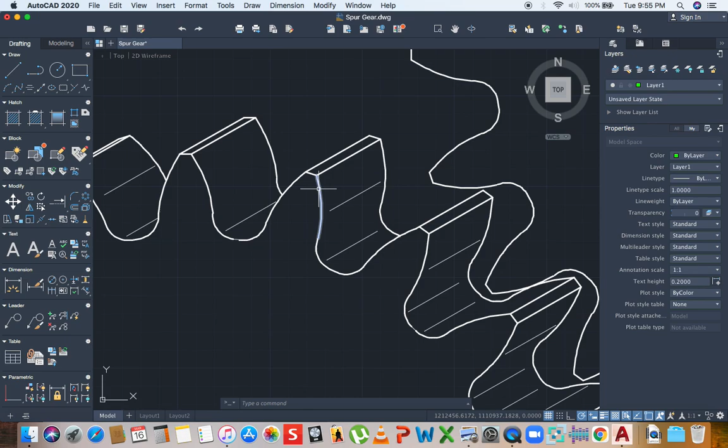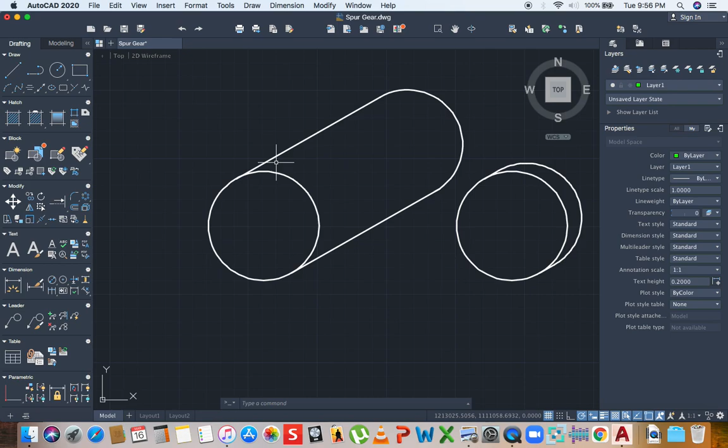All right, so these are two spur gears, and these two spur gears are of equal size, and they are working together in a machinery. Now, the reason why I call this a cylinder, it does not look like a cylinder, but if you remove the teeth, you will suddenly realize that it's a cylinder. Now, if you look over here, you have two cylinders, a very long cylinder, because the height of the cylinder is very large as compared to the diameter, while here the height is considerably smaller than the diameter. So this type of cylinder that we're looking at here is this type, just with some teeth and a hole in the middle.

Now, in order to draw a spur gear, there are a lot of things that we have to know about the spur gear, because at this level of mechanical drawing, we are going to be required to draw two spur gears that are meshing against each other, right? And by meshing, they are working together to transmit a force or transmit movement.

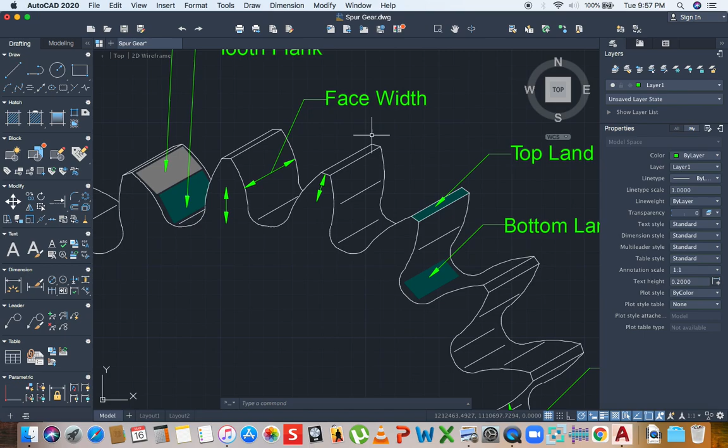Okay, so let's scroll down a bit further, and here I have two images of the same spur gear. Now, let's go over to the image that is more relatable, the image to the left. If you look, you are seeing some labelings that are showing you the different parts of the spur gear. Now, as you can see, this is a spur gear tooth, and this specific spur gear is designed to have 20 teeth.

Now, there are different parts of the teeth. If you look at the top of the teeth, the top surface of the teeth is called the top land. The bottom surface of the space between two teeth is called the bottom land. Let's go over this side. If you notice, this is the side surface of the teeth, and the portion at the top is called the face of the tooth. The portion at the bottom is called the flank of the tooth. Now, let me show you how you know where the flank starts and stops, or the face starts and stops.

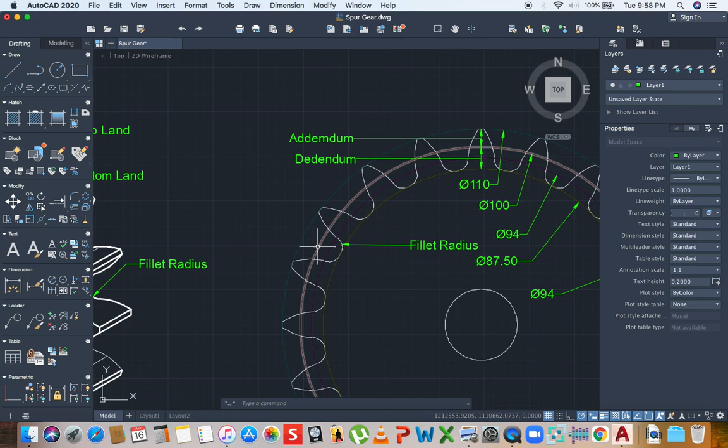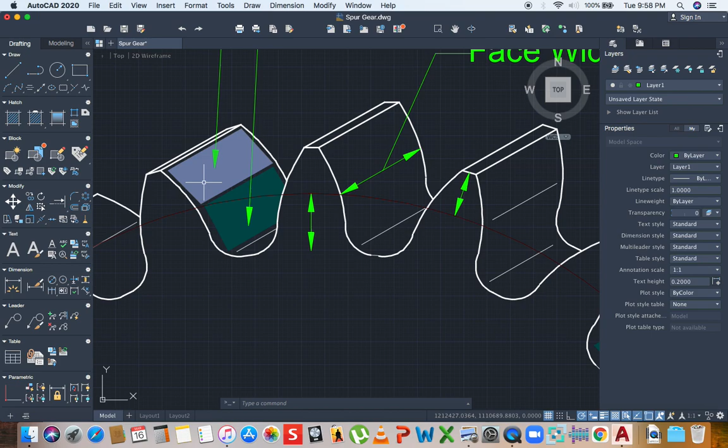This circle right here is the most fundamental circle of drawing a spur gear, and it is referred to as the pitch circle. Let me copy this pitch circle and paste it in the center of the spur gear over here. Now, if you notice, the pitch circle cuts the tooth here. So every part of the side surface above the pitch diameter on the tooth is referred to as the face of the tooth, and the surface below the pitch circle is referred to as the flank of the tooth. I'm not going to remove this just yet.

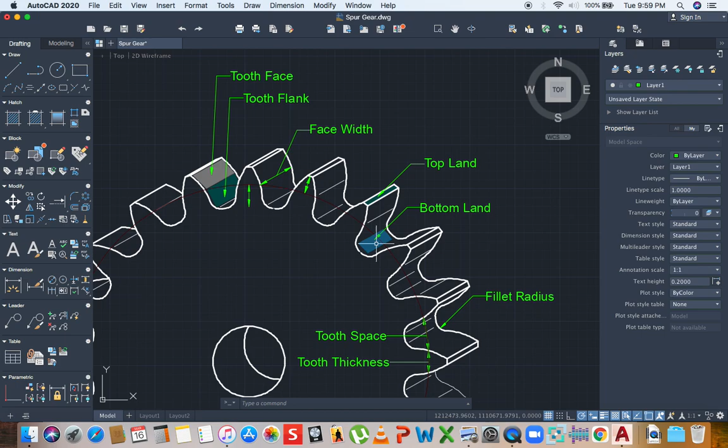Let's look at some other parts. Now, you have the tooth thickness, and this tooth thickness is measured along the surface, or along the pitch circle, as you can see, and you have the space between the tooth.

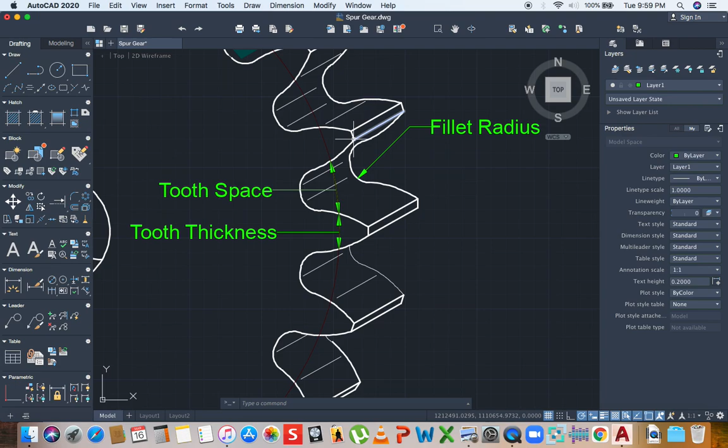If you notice, if you're measuring the distance between two teeth, if you measure from the top, you'll have a greater distance than if you measure from the bottom. So that is why you have a specific spot that you will use to measure the space. And it is measured along the pitch circle. It's similar to the tooth thickness.

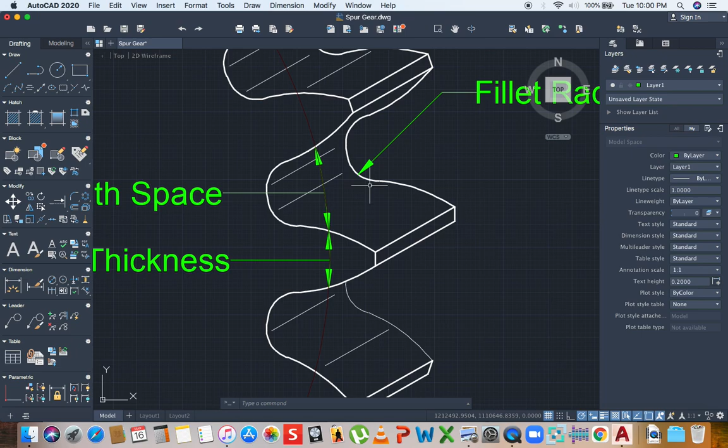Now, then you have the fillet radius, right? The fillet radius is the radius of the circle that will mesh the tooth profile with the base of the tooth, right? So it will not just have a sharp turn, it will have a radius, and that radius is called the fillet radius.

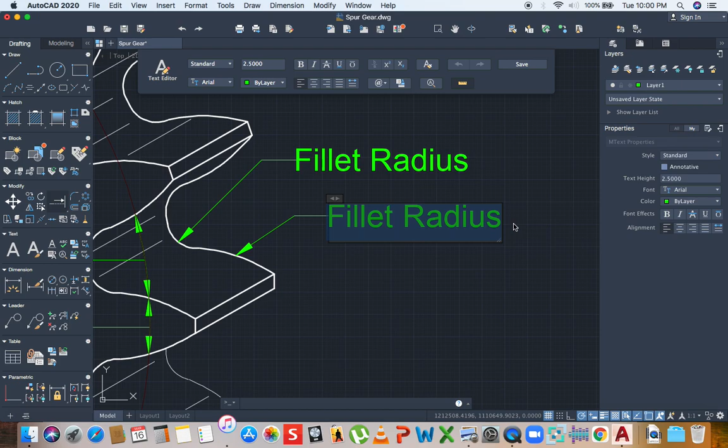Now, I forgot to label the tooth profile of this spur gear, and this is an involute tooth profile. So this curve is referred to as the tooth profile of the spur gear. And in future videos, you will be shown how to construct that. Let me see if I've missed out anything. Oh yes, there are two measurements.

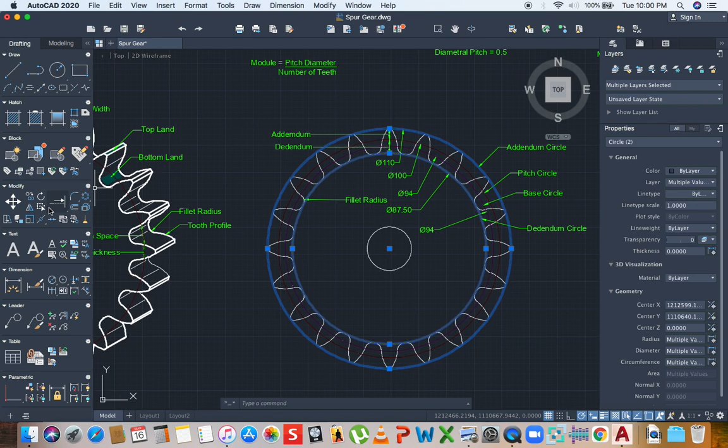I'm going to copy this circle and this circle over here. Now, if you notice, there are two distances that are shown here. This distance, by the way, this circle is referred to as the Dedendum Circle. This circle is referred to as the Addendum Circle. You may see other names that are used to refer to these circles.

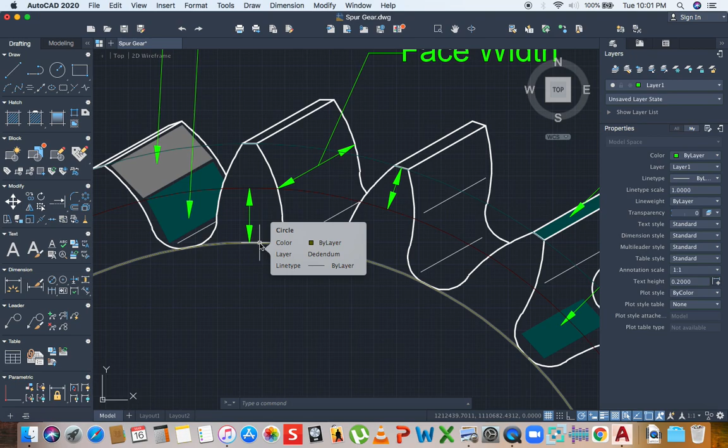Like, for example, the Dedendum Circle is also referred to as the root circle. The Addendum Circle is also referred to as the outside circle. Okay? So, the distance between the root circle and the pitch circle is referred to as the dedendum, as you can see, and the distance between the pitch circle and the outside circle, or the addendum circle, is referred to as the addendum.

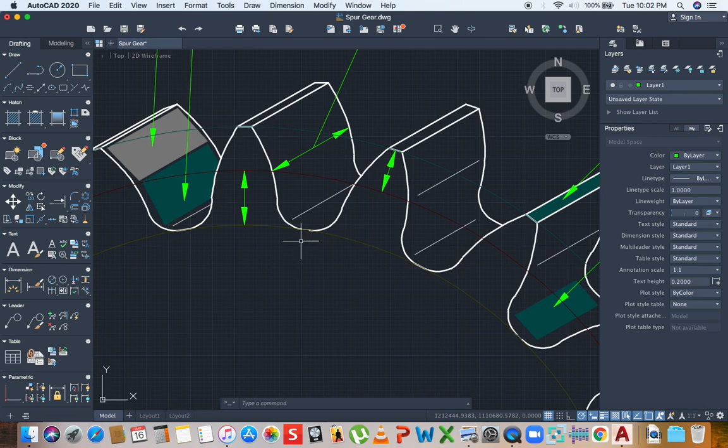So you have dedendum and you have the addendum, and these distances are critical in constructing the drawing of the spur gear. Let me see if I have everything. Yes, we looked at all these already.

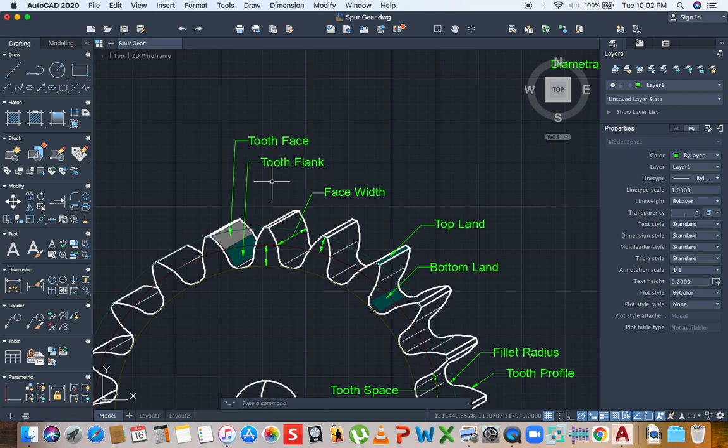So now let's go across to this picture here, or this image here. This image is showing the same spur gear over here. Now over here, this is a very simple diagram. It's just showing you the parts and so forth.

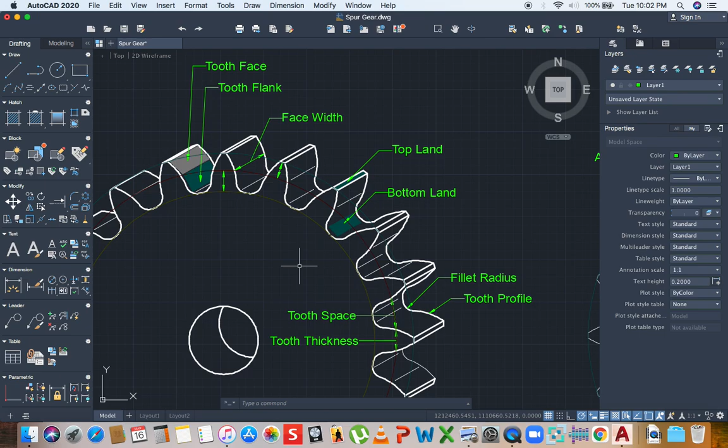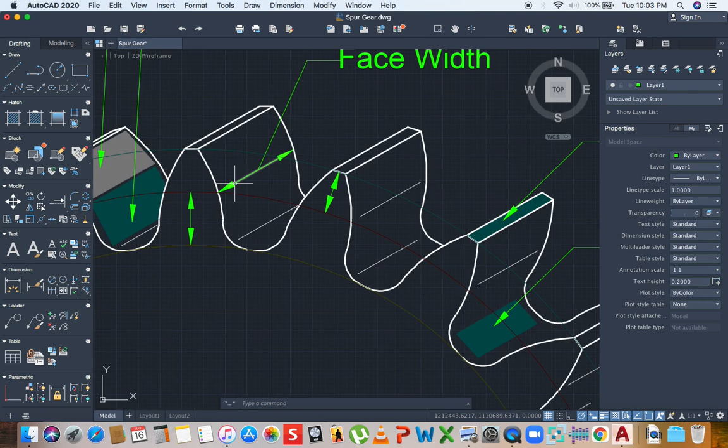Oh, by the way, I missed out the face width. The face width is basically the thickness of the spur gear, right? The thickness, which for the cylinder that is used to make the spur gear, would be the height of the cylinder. It's the distance between this face and the face around the back. Well, it's the face width. As you can see, this is the face of the tooth, and the distance of the face is right here.

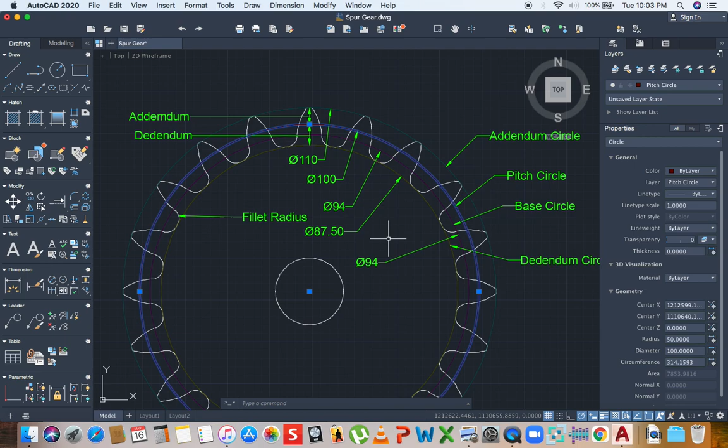Now, let's look at this image here. This image is basically showing some parameters that are necessary in order to construct this spur gear. Now, let's look at it. This circle here, that will be, in a lot of cases, the first circle that you will draw. And this circle that I've selected is called the pitch circle, right?

The pitch circle size will be determined by all the space that the spur gears that are going to be working together will fit in. So you determine this distance if it is not given to you. After determining the pitch circle, you have to determine the amount of teeth that you want in the spur gear. That is if it's not given to you already.

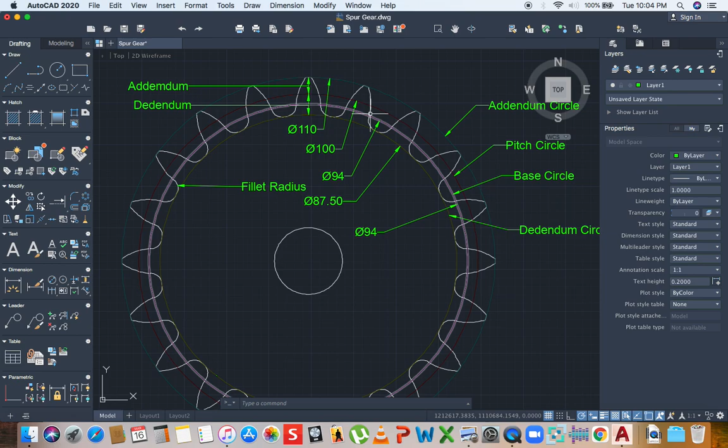Now, on this specific spur gear, there are 20 teeth, right? So the pitch circle diameter, which is the diameter of the pitch circle, and the number of teeth are critical parameters to note in order to construct this. All right, and as you can see, the addendum is shown here again.

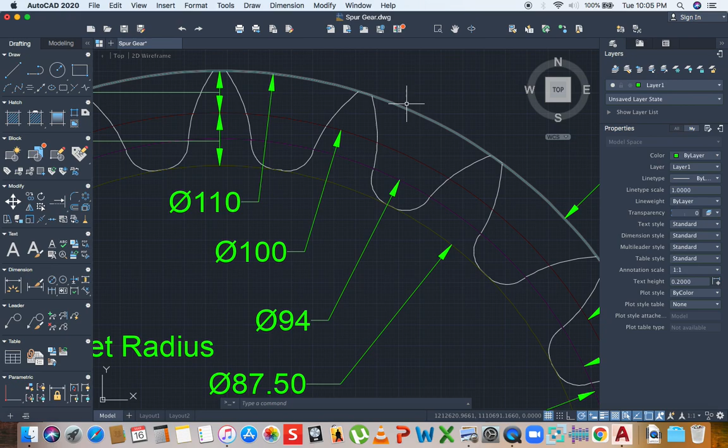The addendum is shown. Okay, and as you can see again, you have the addendum circle, right? That is why the distance from the pitch circle to the addendum circle is referred to as the addendum. You have the addendum circle, and as you can see, this is the circle that cuts off the spur gear, because these involute curves would eventually meet and form a pointed edge.

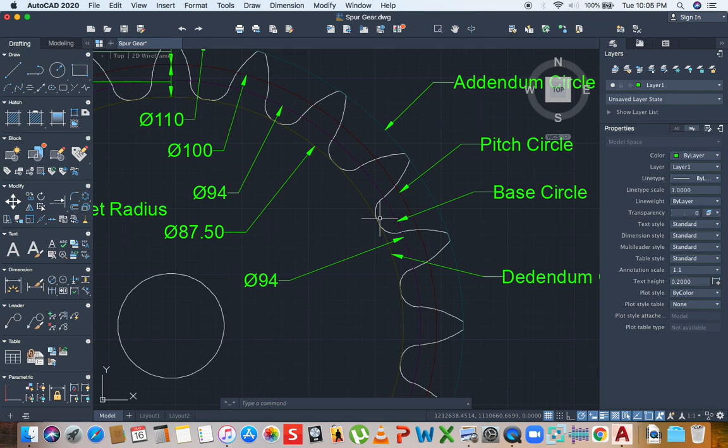But the addendum circle shows where the teeth ends. All right. So you have the addendum circle, and then you also have the dedendum circle. This is the base of the teeth. So the teeth, they don't go below the base, right? So you have the addendum circle and the dedendum circle, and you have the addendum circle diameter, and that is right here. You have the dedendum circle diameter, which is right here.

Now, there are a lot of cases where you will not be given the addendum circle diameter and the dedendum circle diameter. Those circle diameters are critical in constructing the spur gear. If you notice, there's another circle that is called the base circle. That circle you will eventually find, right? And in the next video, I'll explain further on how to find the base circle when we're actually going to show you how to construct the spur gear.

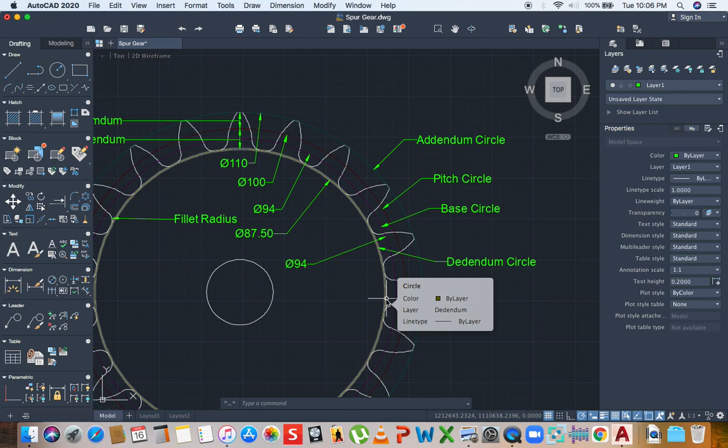So please observe the diagram again. I've already explained what the addendum is and the dedendum. They are distances, and you can see the distance. One is between the pitch circle and the root circle. The other is between the pitch circle and the addendum circle, right? There's a way to achieve the base circle diameter, and that will be in a further video as I explained before.

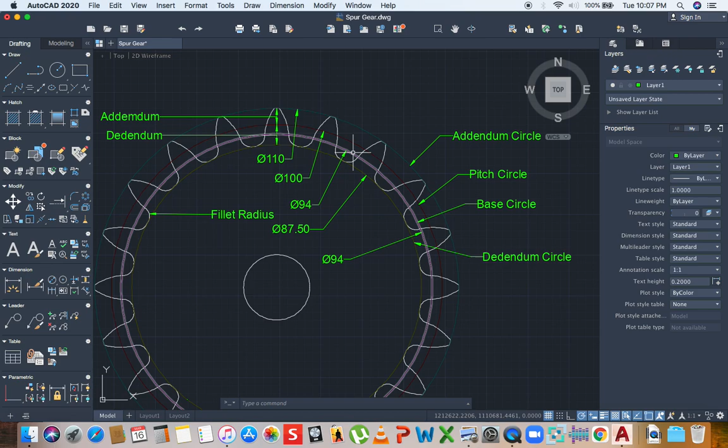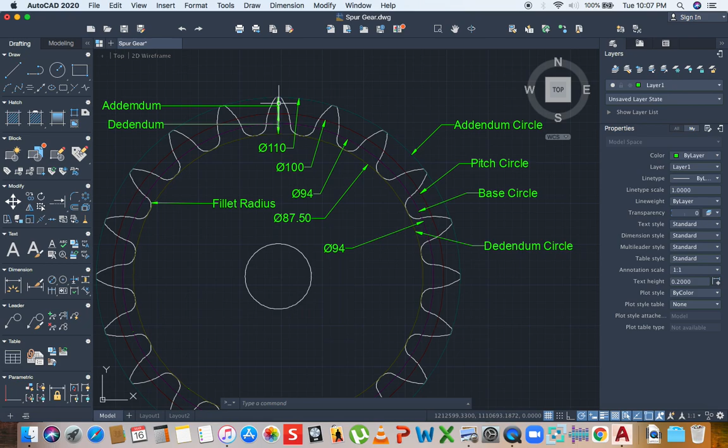Now, after you have selected or assumed the number of teeth that you need, and you have selected a suitable pitch circle diameter, you need to now determine the diameter of the addendum circle and the dedendum circle. Once you get those distances, you are now able to achieve the addendum and the dedendum. Now, let's go over to these formulas.

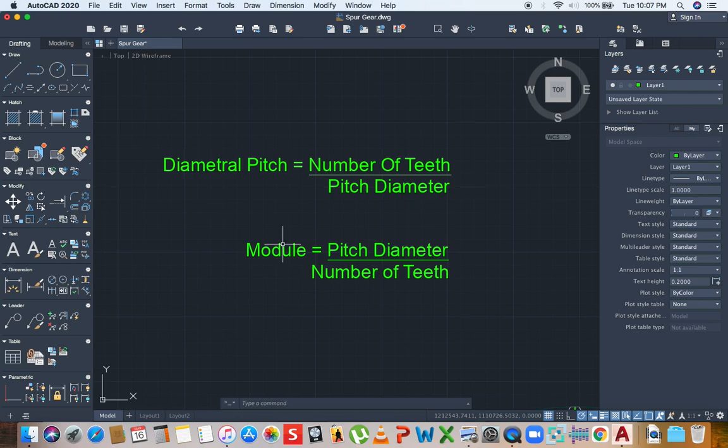There are two critical formulas here that are necessary in order to draw the spur gear. I don't know if I should refer to this as a parameter, but this is the first formula. You need to find the diametral pitch of the spur gear, and you also need to find the module of the spur gear. And as you can see, this simple formula only entails division. It is showing you how to get the diametral pitch, and it is also showing you how to get the module.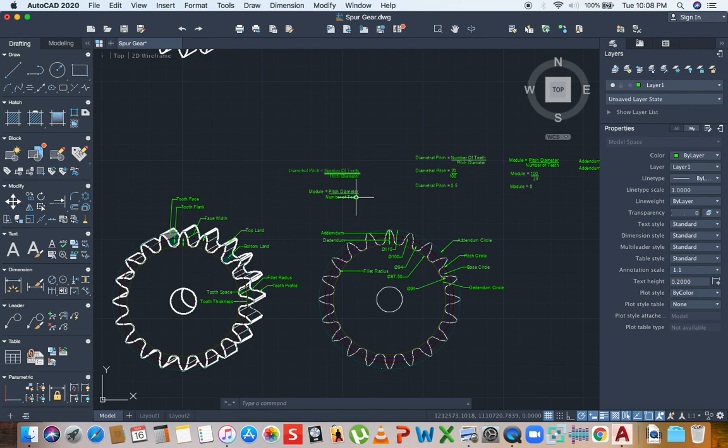Now, the diametral pitch is found by dividing the number of teeth, in this case it's 20, by the pitch diameter. Now, if we're supposed to find the diametral pitch for the specific spur gear that we're looking at, please observe the measurements here. You will realize that once you divide the number of teeth, which is 20, by the pitch diameter, you will end up with a diametral pitch of 0.5. Okay, or this is half.

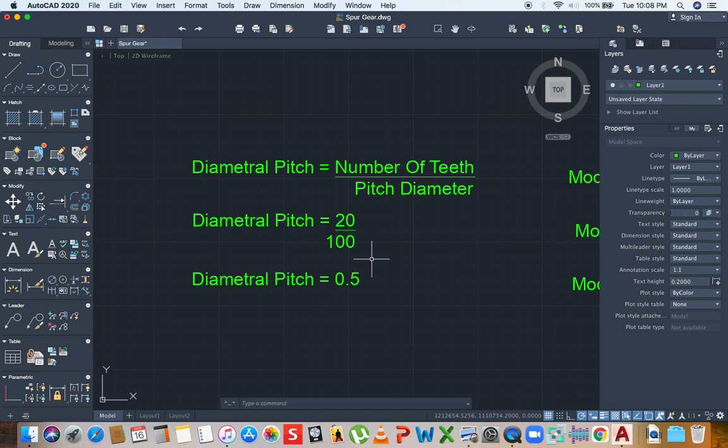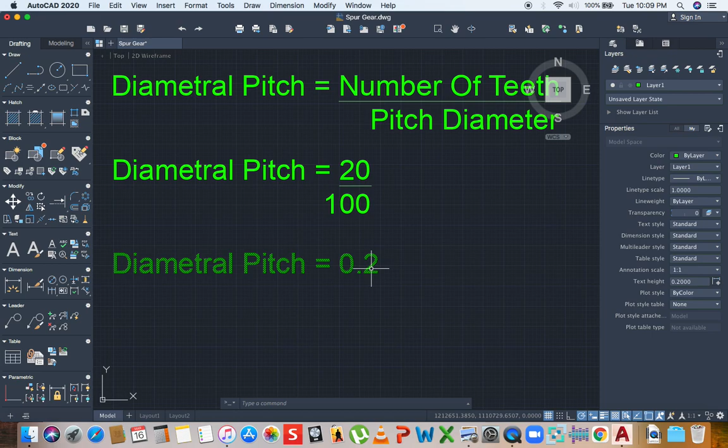I think I may have calculated this incorrectly. Let me go ahead and correct that. So it's 0.2 actually. All right, so 0.2 is the diametral pitch right here, right? So the diametral pitch here is 0.2. Now, what is the purpose of finding the diametral pitch?

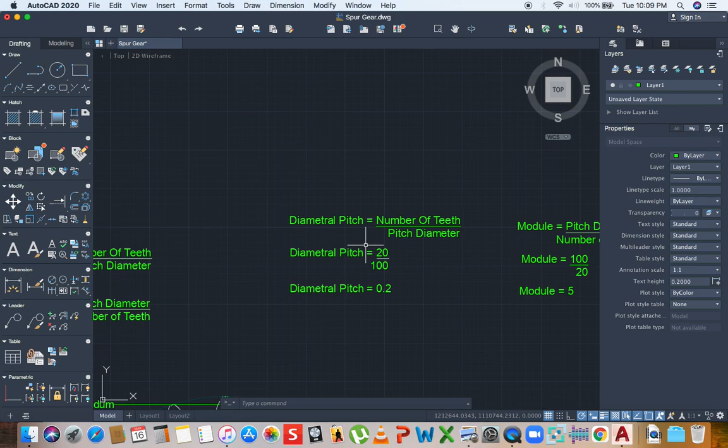Let me explain. Now, if you have two spur gears meshing together, once the sizes are different, they are going to need a different amount of teeth. For example, the larger spur gear will possess more teeth than the smaller spur gear. These spur gears that you are seeing here are of the same size. But you have instances where one spur gear is larger. Now, if you have a larger spur gear, let's say this was the larger spur gear and you needed a smaller spur gear, right?

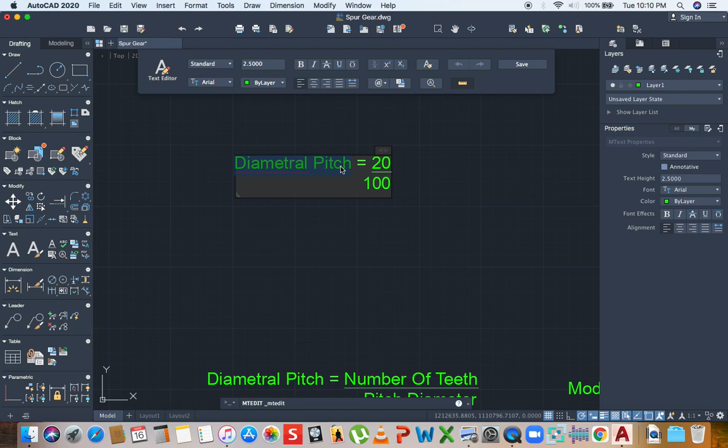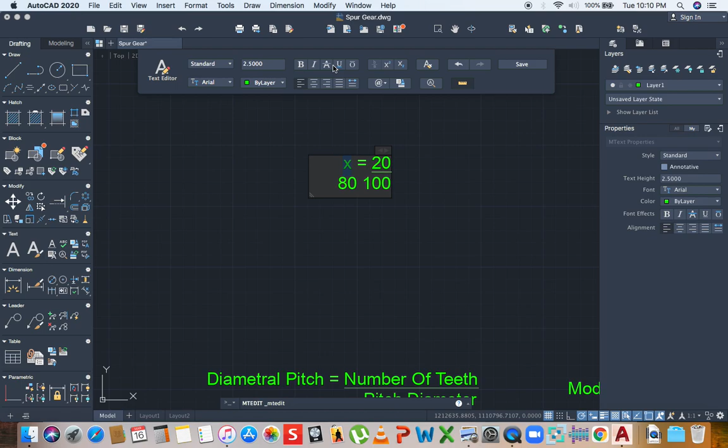And let's say that the smaller, let me copy this formula. Let's say that for the smaller spur gear, the diametral pitch, the pitch diameter for this smaller spur gear, let's say that it was 80, right? All right. So this is the diametral pitch over here for the larger spur gear. The number of teeth versus the pitch diameter.

For the smaller spur gear, the pitch diameter is 80 and we don't know the number of teeth. Remember we said that it's supposed to be less. So whatever the diametral pitch is over here, it is supposed to be the same over here. So this is the, let me go again so I don't confuse you guys.

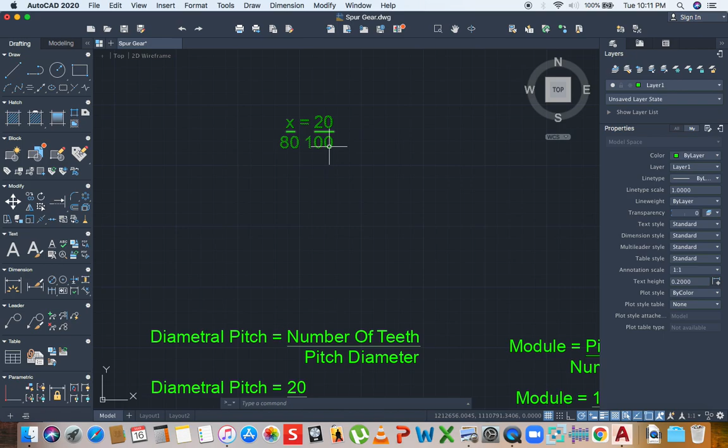This is the number of teeth for the larger spur gear. This is the pitch diameter for the larger spur gear. For the smaller spur gear, we are given a pitch diameter of 80 millimeters. In order to calculate the number of teeth needed for this spur gear to mesh, you are going to use this equation here. Now, you are going to solve for x.

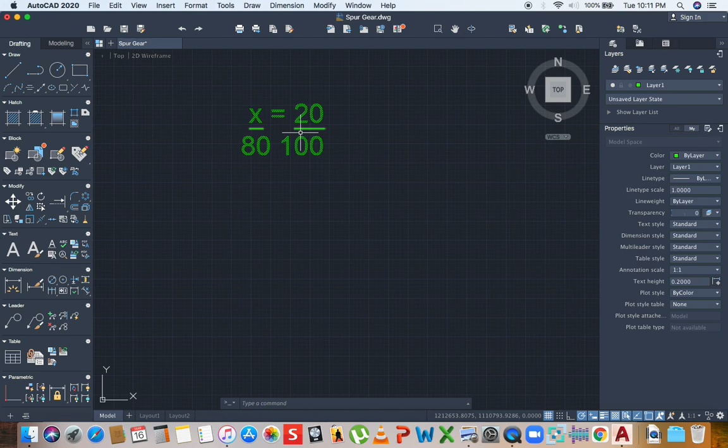So x would be 20 divided by 100. Let me see if I have this formula right. Yes. So this would be 2. This would be 10. This would be 1. This would be 5. Right? And if you were supposed to bring the 80 over, all of a sudden the 80 would be divided by the 5. 80 divided by 5, and the answer is 16.

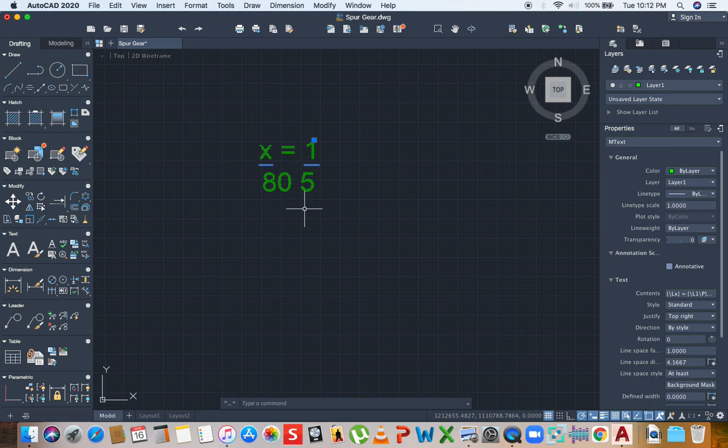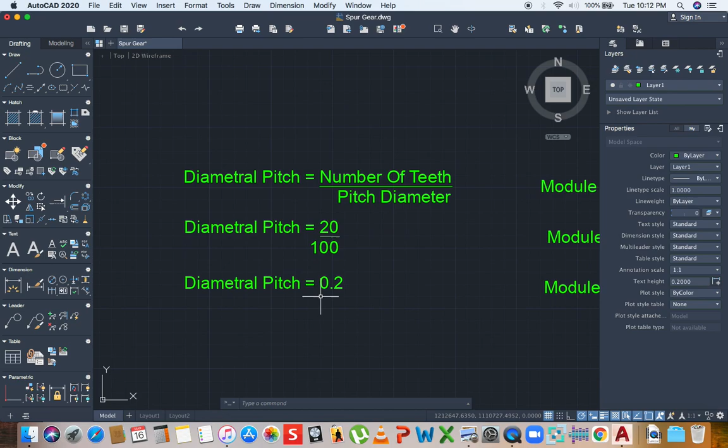So let me put 16 here, the 20 here, and the 100 here. Now, 16 divided by 80, if you check that out, you will get 0.2. That is the diametral pitch. If you divide the 20 by 100, you'll get 0.2, which is also the diametral pitch. So you realize that even though the two spur gears are of a different size and have a different number of teeth, the diametral pitch for both is the same.

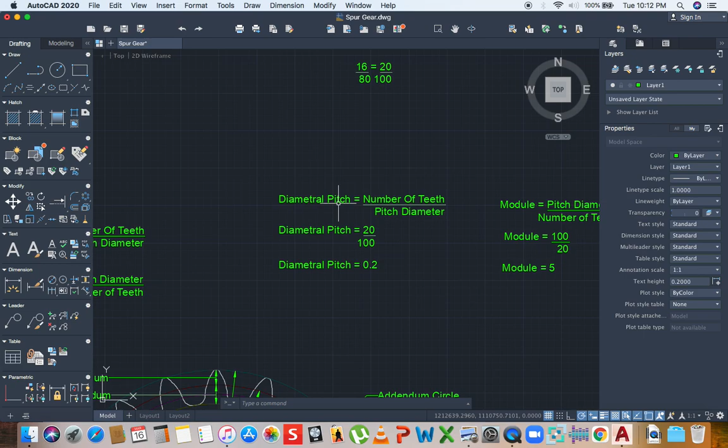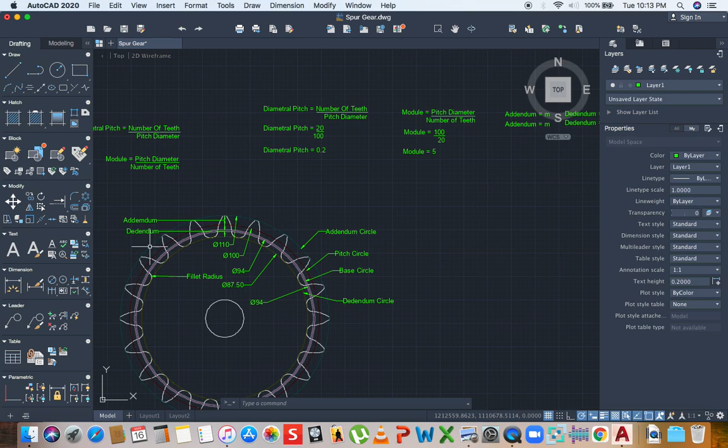For these, they are the same size, so they'll have the same number of teeth. So you get the idea. The diametral pitch is used to determine the number of teeth that you need for the second spur gear, because you would assume the first one. There are some other formulas, and this is more advanced stuff, to calculate if the number of teeth is suitable and so forth. But for now, let's say that our assumption is correct and we have safely assumed the number of teeth.

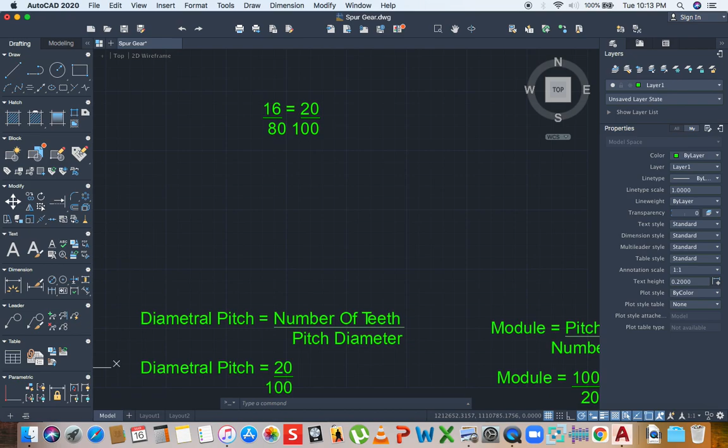Then we can now find the pitch diameter of the other spur gear. If it is given, then you use it, and you can use this formula to determine the number of teeth for the smaller spur gear. I'll explain that in a future video when I'm actually constructing the spur gear.

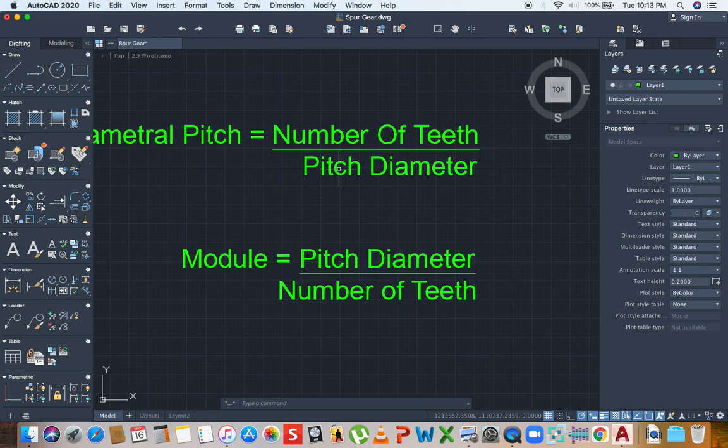Now, the next formula that is critical is the module formula. In order to find the module of the spur gear, notice these formulas are similar. In one, you divide the number of teeth by the pitch diameter, while for the module, you divide the pitch diameter by the number of teeth. For this specific spur gear, you are dividing 100, which is the pitch diameter, by the number of teeth, which is 20, and the answer is 5. So the module is 5.

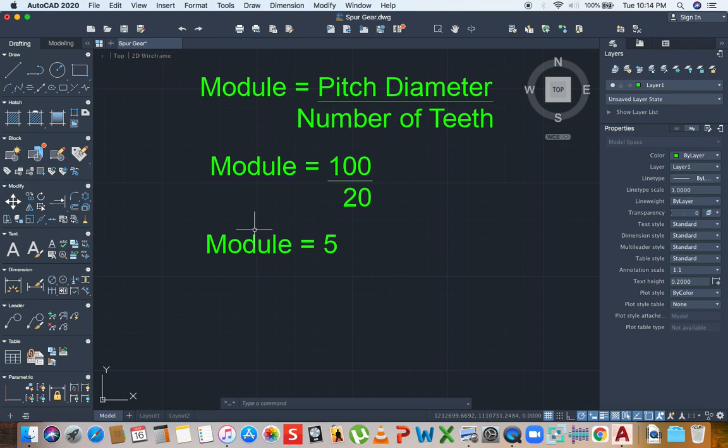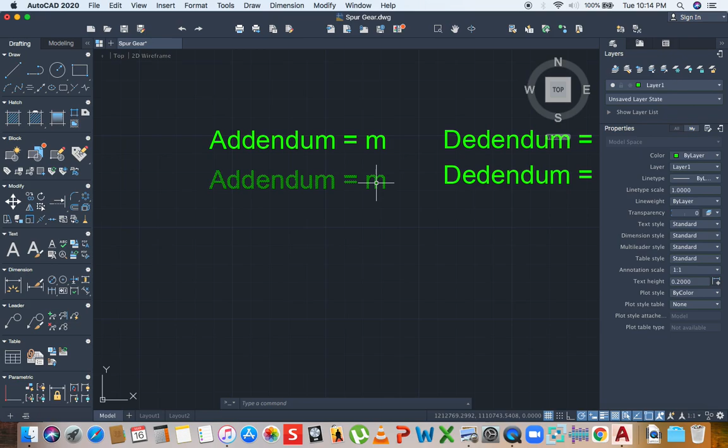Why would we need to find the module? The module is used to determine the addendum circle diameter and the dedendum circle diameter. So now you know how to achieve this circle, which is the dedendum circle, and this circle, which is the addendum circle. Now, most commonly, the addendum is given as m, like how the module is 5. By the way, this M stands for module. So the addendum equals 1 module.

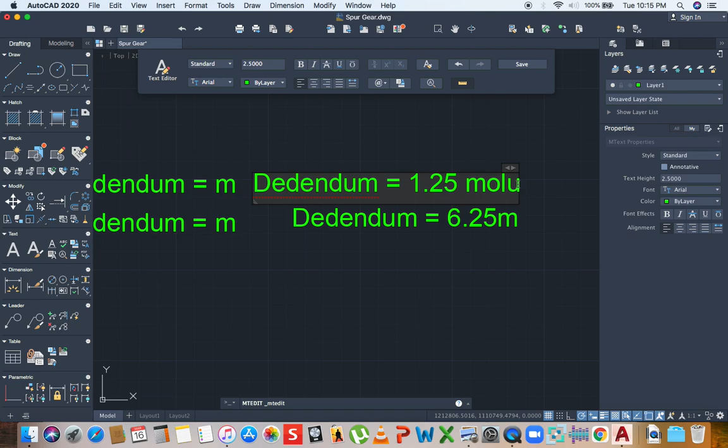The dedendum equals 1.25 modules. So this is modules. Let me write modules so you're not confused. I don't want you to think it's millimeters. So let me bring this over a bit.

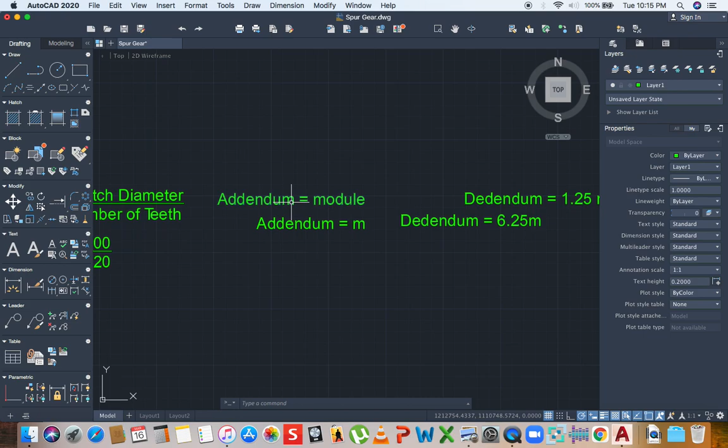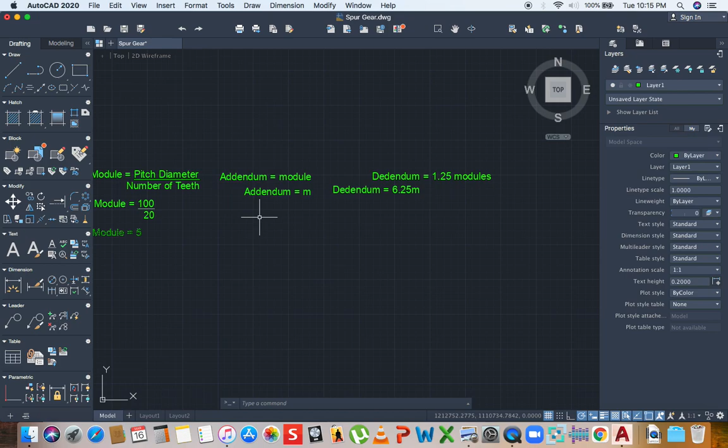Okay. Since the addendum is equal to 1 module and the module for this spur gear is 5, the addendum for this spur gear will be 5. Since the dedendum is 1.25 modules and the module is 5, the dedendum is 6.25. All right, let's do that again.

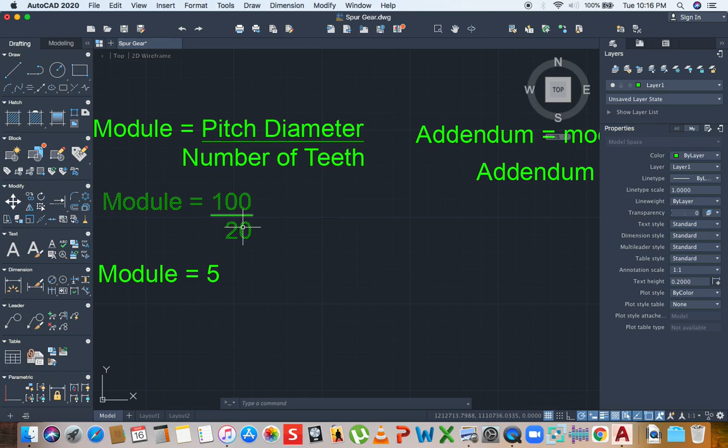We calculate the module using this formula, and for this specific spur gear it is 100 because the pitch diameter here is 100, as you see it's pointing on the pitch circle, and that is divided by the number of teeth, which we know is 20, and you get 5. Now this module is used to determine the addendum.

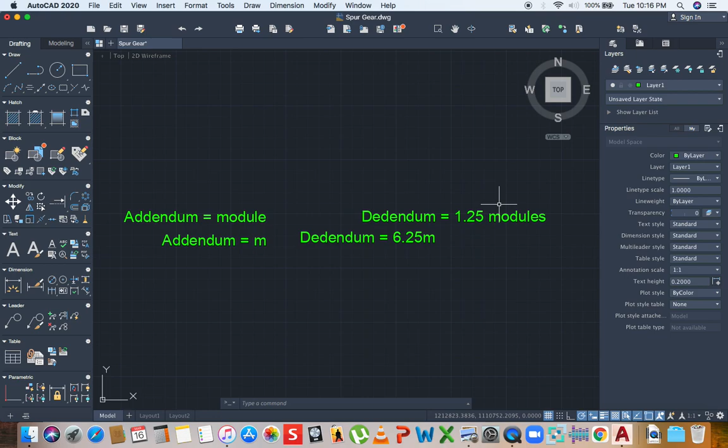There are various values that are used for the addendum and the dedendum in terms of modules. Sometimes the addendum is 1 module, sometimes it's 1.35 modules, it varies. But most often the addendum is 1 module and the dedendum is 1.25 modules. And that's what I'm working with today. So the addendum is 5.

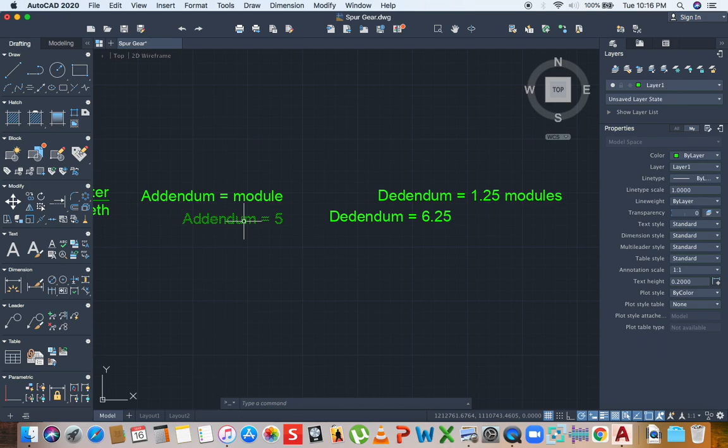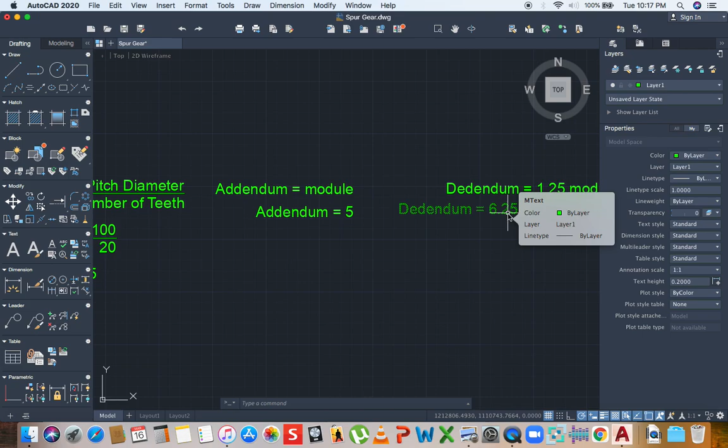And if you notice, I'm working unitless. I didn't specify what units we are working with, whether it was millimeters or so forth. So the addendum is 5, while the dedendum is 6.25, based on what the dedendum normally is. If the dedendum was 1.35 modules, we would have multiplied 5 by 1.35, and then the answer here would be different. So now if you look here, the addendum is 5, the dedendum is actually 6.25, and I could have just put in brackets here.

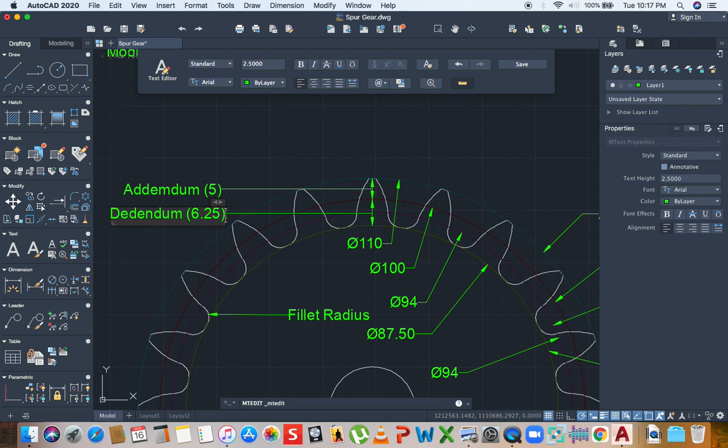In this case, the addendum is 5, and the dedendum is 6.25. Now, what does that mean for the addendum circle diameter? All right. So since the pitch circle is 100 millimeters in diameter, it would simply mean that the addendum circle would be 5 times 2 more than the pitch circle diameter.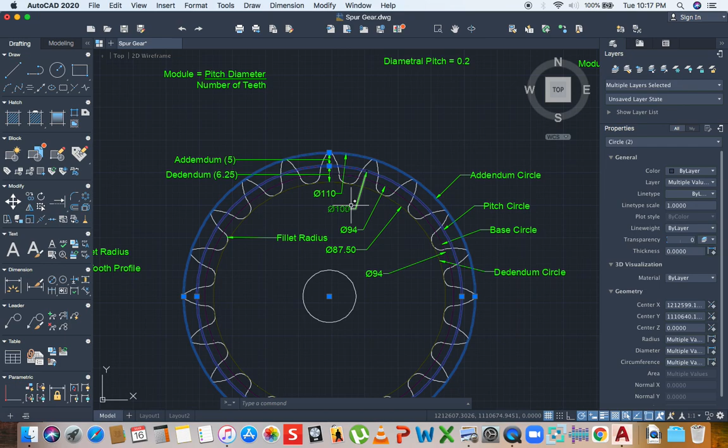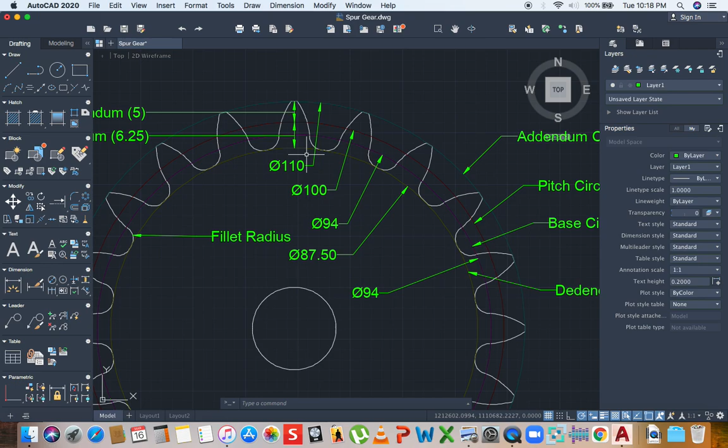Why times 2? Now, this distance here, you have 5 here on this side, and you also have 5 on the other side. So the diameter of this circle is actually larger than this circle by, if you notice here, 10. This is 100, this is 110. Now, what I basically did here, I drew the pitch circle first, and I used the offset command and offset the addendum, and then I used it again to offset the dedendum below.

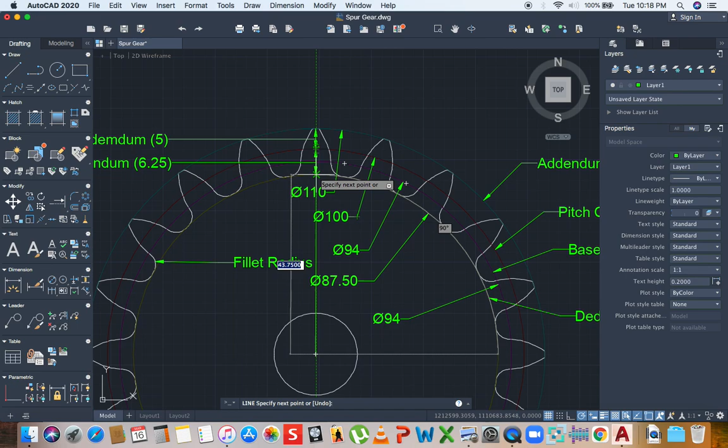Now, if we are working with the radius, from here to the pitch circle would be 50, since the diameter is 100. From here to here would be minus the dedendum. From the pitch circle to the top here would be adding the addendum. And notice we're talking about the radius. Now, if we are working with the diameter, everything will be doubled.

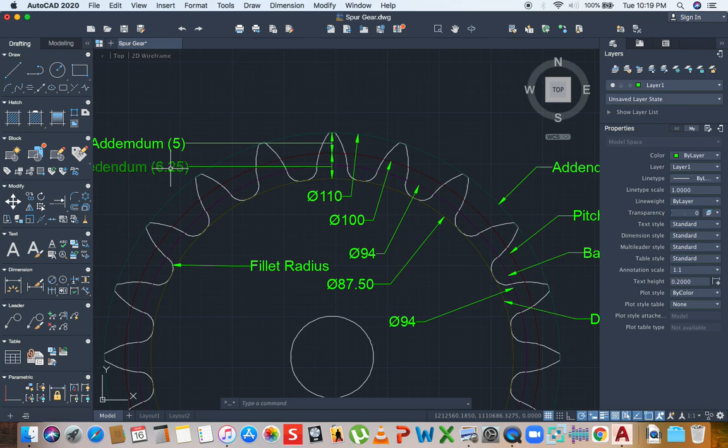So that is why, in order to get the diameter of the addendum circle, we add 5 times 2. And to get the diameter of the dedendum circle, it is 12.5. Whatever this is, we multiply it by 2, then subtract it from the pitch circle diameter. Simple math will show you why that is the case.

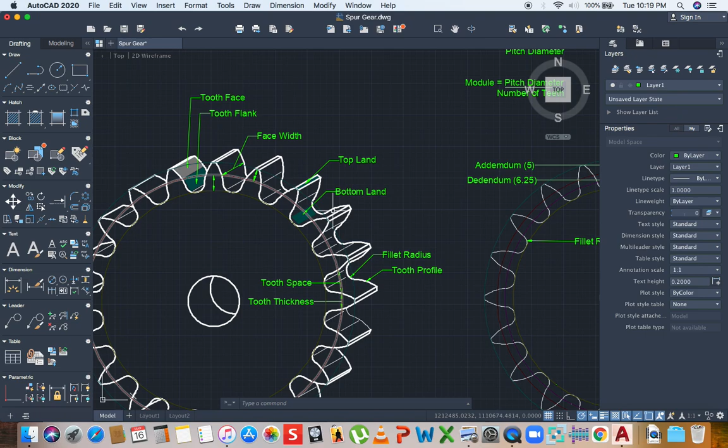All right, so let me see if I've covered everything. So we have covered the definitions, or the descriptions or the labelings here. And as I said before, these will be posted in the group description. We have also covered the different circles that are needed to construct the spur gear. We have the pitch circle. This is the first that is normally given. Notice I said normally. I've seen a lot of videos where persons started off even with the root circle. Alright, but we're starting off here with the pitch circle and the number of teeth.

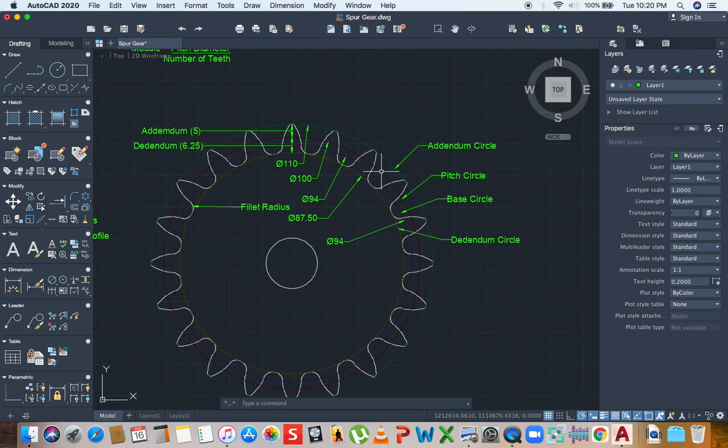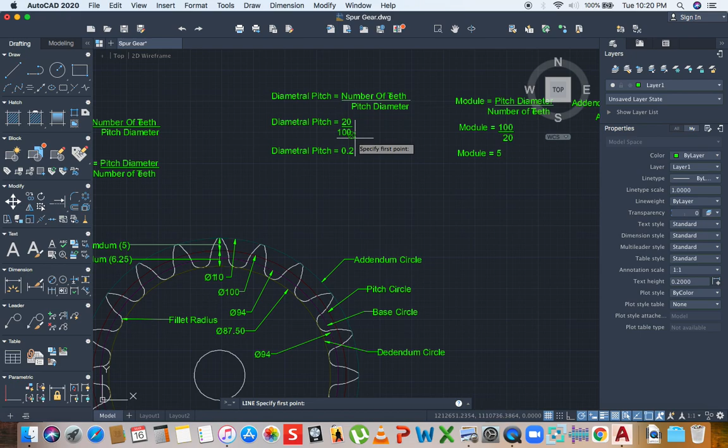And once you use those, it will help you to determine the addendum circle and the dedendum circle by use of this formula right here, the module formula. And it will also help you to determine the diametral pitch. And as I was explaining before, the diametral pitch helps you to determine the number of teeth that will be required for a second spur gear that will be meshing with this spur gear in any machine that it is being used for. So basically that's it for this lesson.

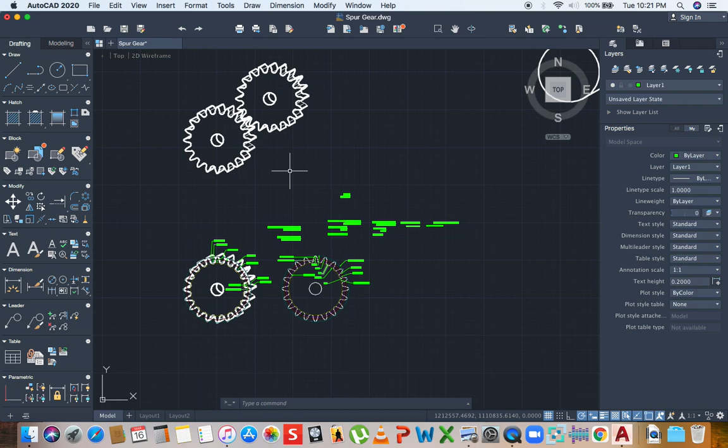Please stay tuned for the next lesson. In the next lesson, you will hear some terms such as pitch point, pressure line, pressure angle, clearance circle. Those terms that I've just mentioned are better explained when you are seeing two spur gears meshing together. And a lot of those parameters are needed in order to draw two spur gears together, right? So stick around for the next video.